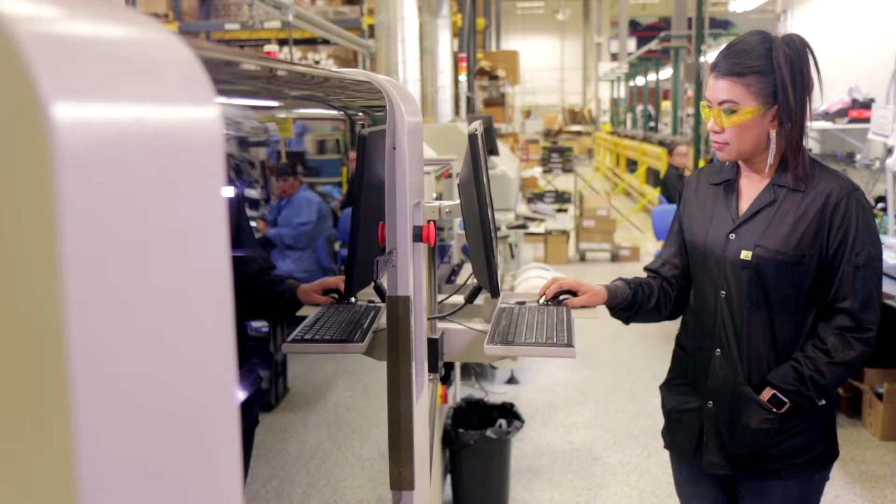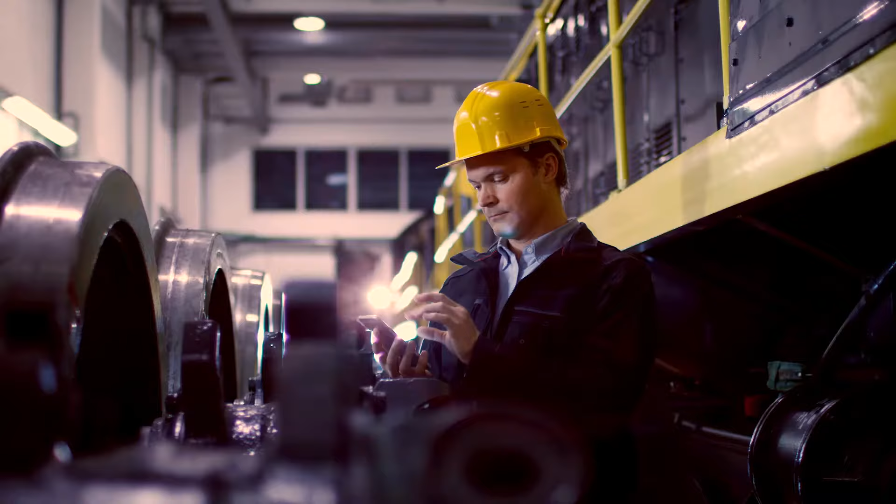It is a wireless revolution, and PCTEL is at the heart of it, providing performance-critical telecom solutions to support global wireless connectivity. PCTEL is a leading global supplier of antennas, radio services, and wireless network testing solutions for the wireless industry. Our products can be found in applications across many industries, including enterprise wireless networks, intelligent transportation systems, fleet management and asset tracking, utility smart grids, process automated factories, and public safety communications.

All those applications are going to require connectivity, they're going to require antennas, and you're going to need to have the ability to test the wireless network.

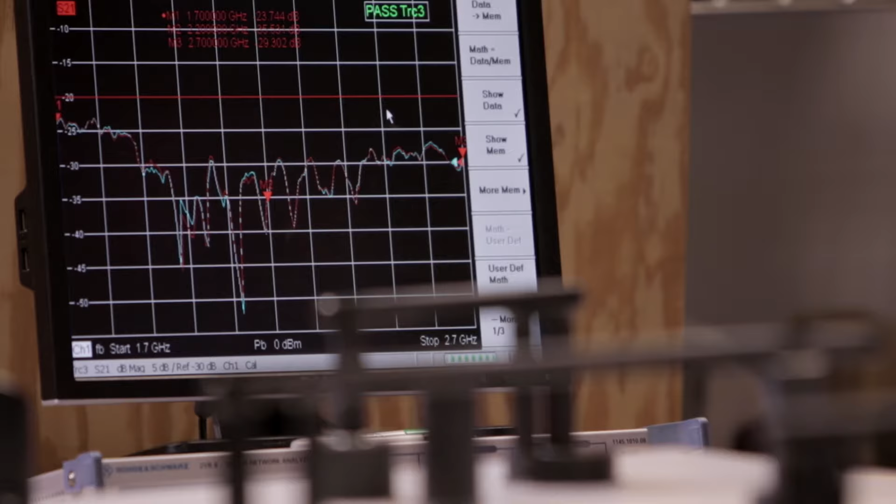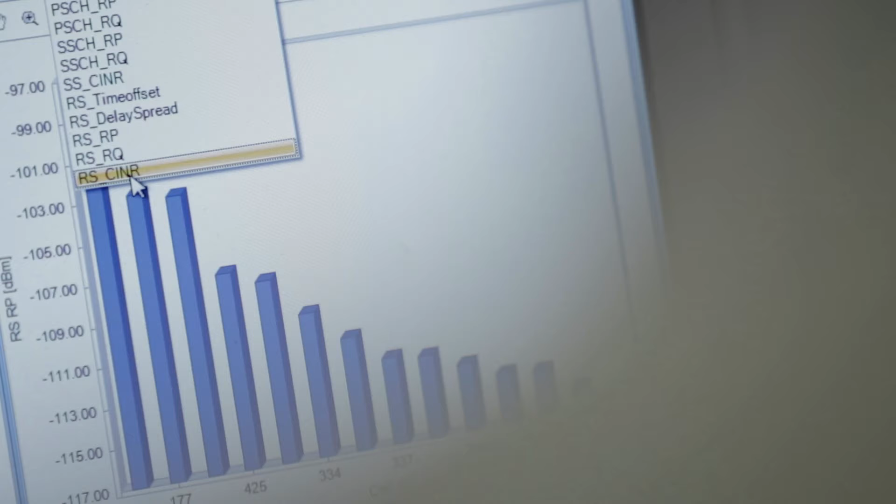Our competitive advantage is really the ability to solve complex RF problems, whether it's a multi-mode, multi-band antenna, or a new algorithm to test 5G for the new wireless technologies from our test and measurement group. Our antenna products team specializes in application-oriented antenna solutions.

PCTEL antennas are deployed with global OEM small cell equipment, land mobile radio devices, Wi-Fi access points, and wireless routers used for the industrial Internet of Things.

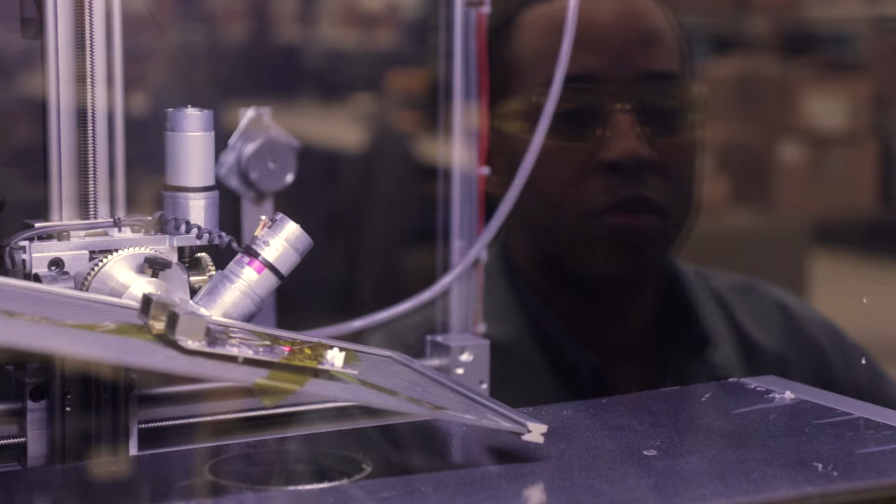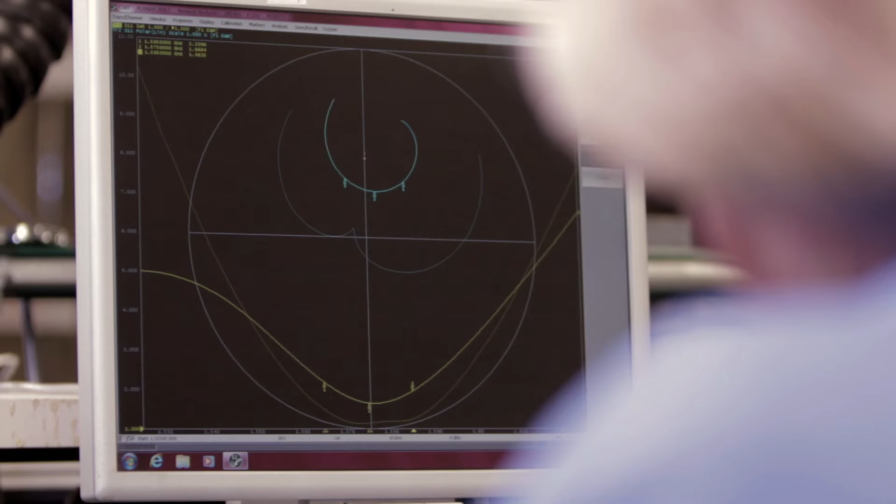IoT presents great opportunities for PCTEL. It's driving proliferation of wireless devices everywhere. PCTEL brings turnkey design and development capabilities for wireless devices, including integration of computing hardware, sensors, radios, and antennas for custom applications for a variety of vertical market deployments.

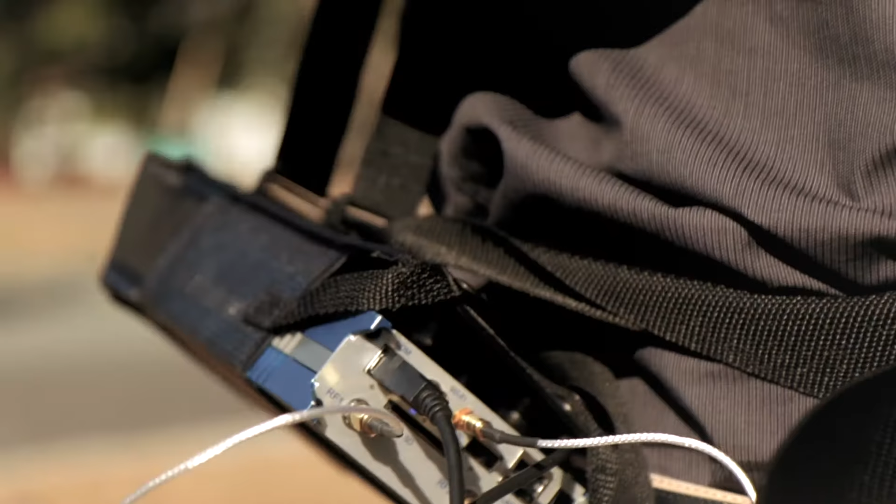PCTEL designs and manufactures performance-critical test and measurement solutions that are used by the top carriers, neutral hosts, and equipment manufacturers around the world. PCTEL's test and measurement products help network operators deliver the seamless performance that users demand for wireless mobility and reliable public safety network interoperability.

Focusing on the latest developments in LTE, Wi-Fi, and 5G technologies, PCTEL's SeeGull Flex scanning receivers and test solutions allow operators to analyze, design, and optimize the connectivity of their indoor and outdoor networks. These networks continue to grow in complexity.

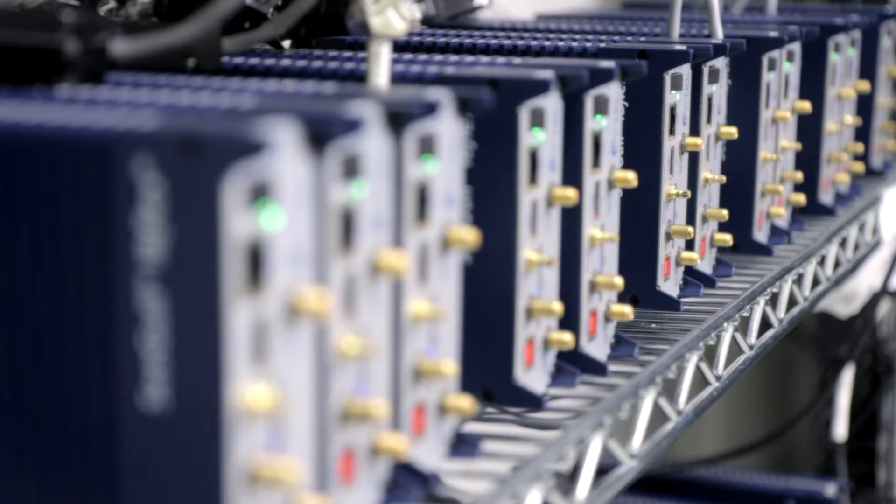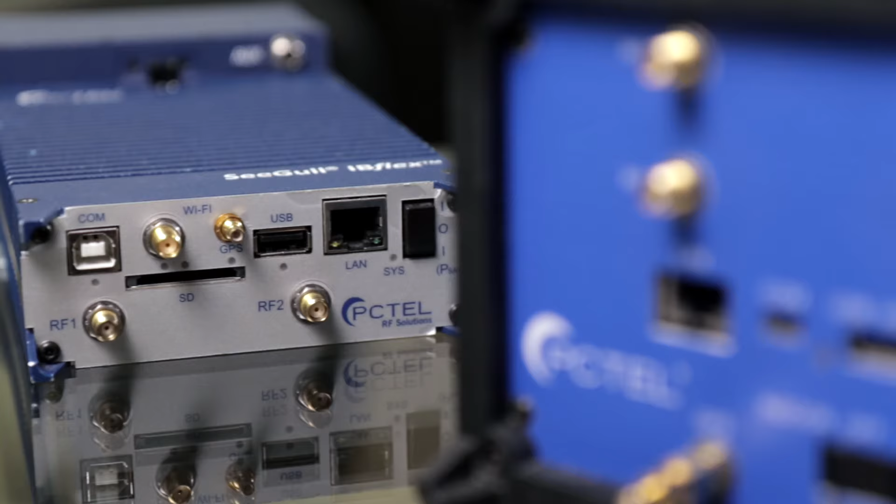PCTEL scanning receivers support deployments of new technologies and frequency bands globally, including 5G millimeter wave spectrum. Scanning receivers provide a high-fidelity view of the RF environment that can't be matched by other testing methods, such as handsets.

At PCTEL, we believe that technological innovation and social responsibility lead to customer-driven financial success. PCTEL products are precisely engineered to consume less energy and reduce labor installation requirements.

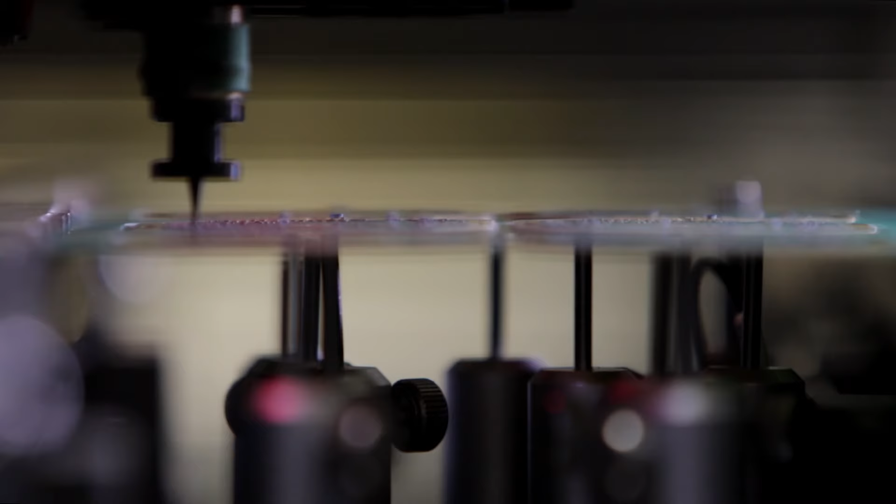Engineering around RF is really an art and science, and to have the experience that we have on those teams is a great benefit for PCTEL.

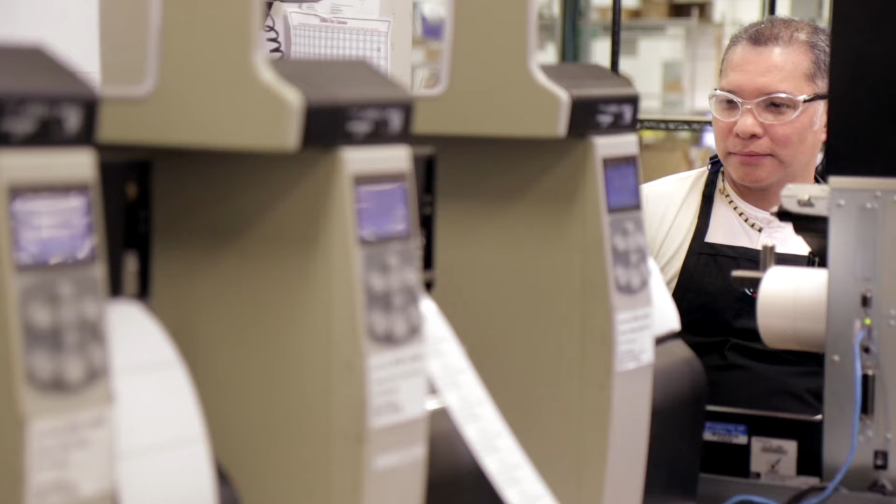PCTEL's technology is supported by world-class ISO 9001 certified manufacturing facilities in the United States and China. Servicing a truly global customer base, PCTEL's factories have been approved to produce private labeled products for the leading original equipment manufacturers in the telecommunications industry.

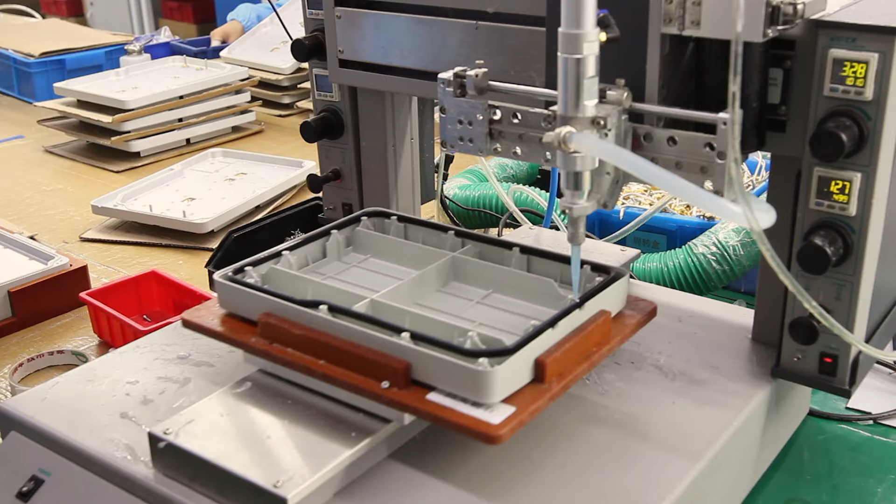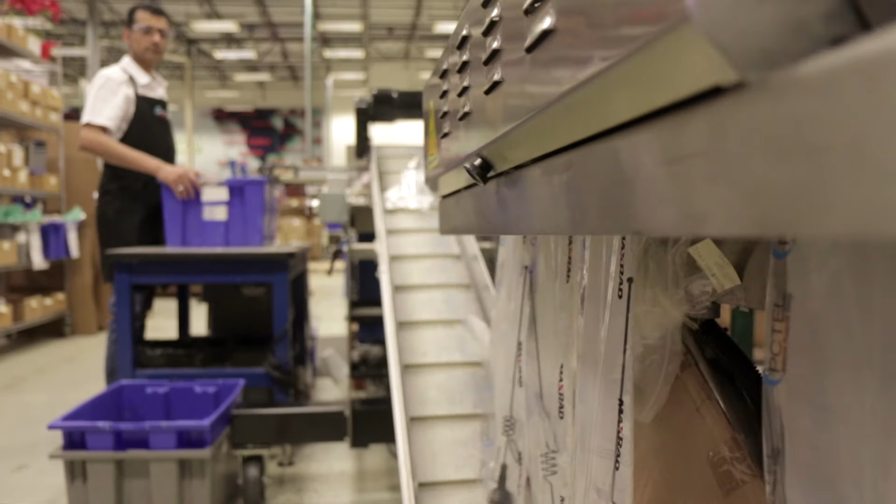PCTEL's continued investment in process automation, quality assurance methodologies, and a highly trained and diverse labor force consistently produce outstanding results for our customers and investors. We have world-class manufacturing. Our brand stands for performance and quality.

Wireless is really an exciting place to be. We have a great team.

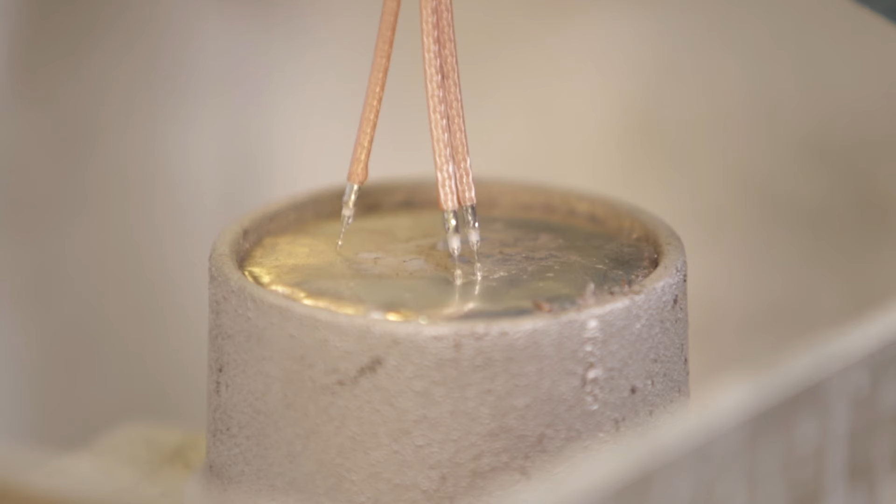So regardless of the project, when it comes to performance-critical communications, trust the leader, PCTEL.